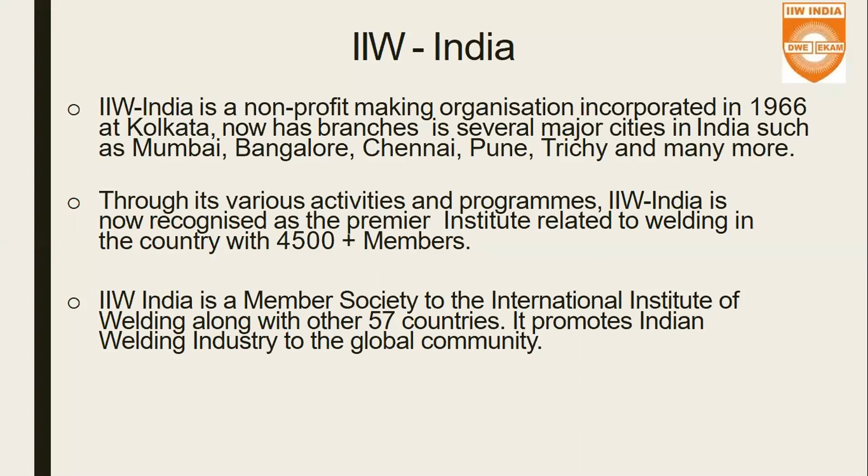What are the major objectives with which IIW India is working? IIW India is assisting the welding industry in India with regards to human resource development, by means of technology diffusion to the industry and individual levels. It is very much helpful to industry with regards to R&D in welding. At the same time, the health and safety of personnel and the industry in totality is important, so it is promoting that also. It is establishing international standards of quality and safety for the overall Indian fabrication industry. These are very important objectives, well covered by IIW India.

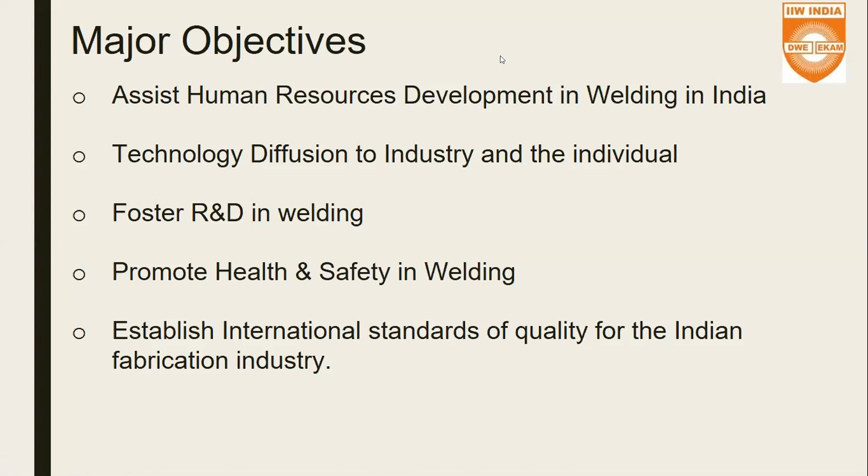Coming to the activities, some important ones are conducting technical meetings like the one we are having today, industry-oriented training programs, and organizing seminars, conferences and exhibitions at branch, national and international levels. One important activity of IIW India is publishing the Indian Welding Journal, which is quarterly, in collaboration with AWS, and a monthly newsletter is also available on its website. We request you all to kindly go through the website to know more details about it.

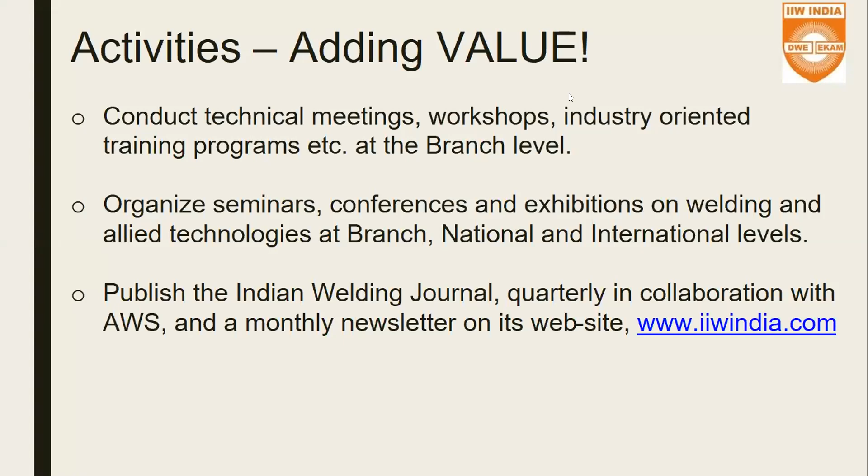For welding training certification, IIW India is the ANB, autonomous national body, providing the platform for individuals to obtain international qualifications, for example IWE, IWT, IWS, and many more. With regards to skill development, IIW India is providing career opportunities by means of skill councils in association, for example automotive sector skill council, capital goods sector skill council, and Indian iron and steel sector skill council. By this association, it is catering to skill development across the country.

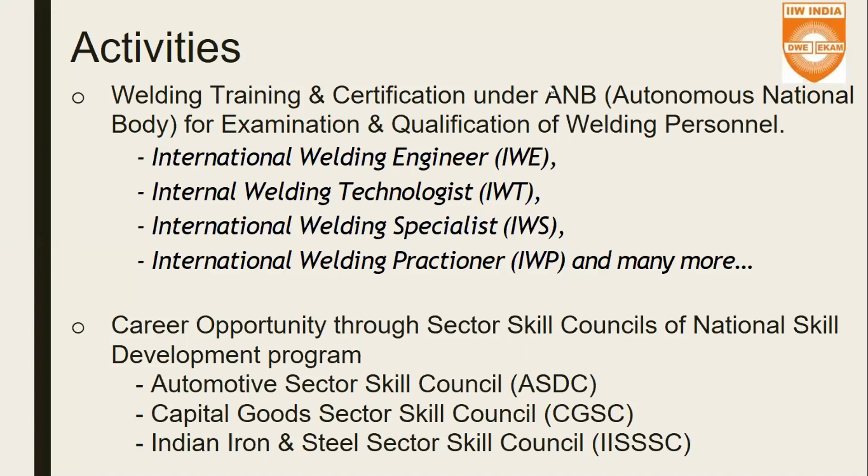As already discussed, Indian welding journals, branch level and national level technical programs, and skill development programs are core activities, along with conducting AM-IIW exams and national welder training and certification programs.

One important activity IIW offers for the industry is the manufacturer certification scheme as per requirements of ISO 3834, training the trainers, arranging welder competitions for both male and female, and many other things.

What are the benefits of being a member? You can take advantage of several courses and examinations for improvement of your own personal career. You can acquire and disseminate knowledge in welding to the industry. There is useful networking with fellow national and international experts. You get access to various technical journals published, and access to monthly technical lectures. You also get concessional charges for paid seminars and technical workshops.

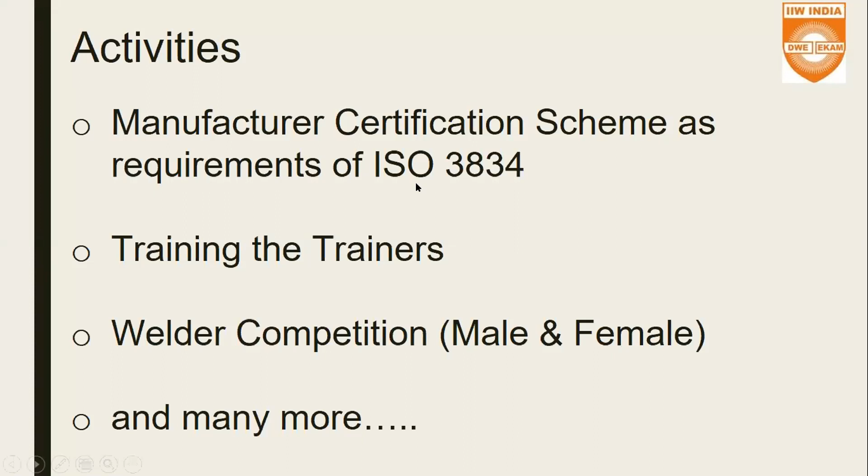The coming slides are just for your glance to see the types of membership for individuals. You can become a member, or opt to become an associate member, or even a student member is possible for you to get associated with IIW. These are the details you can see on the slide. Depending upon your qualification and eligibility, you can join us as a member of IIW.

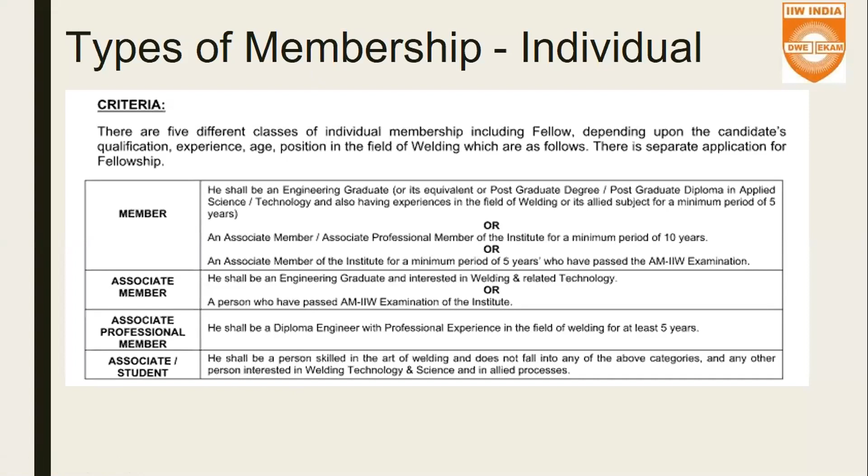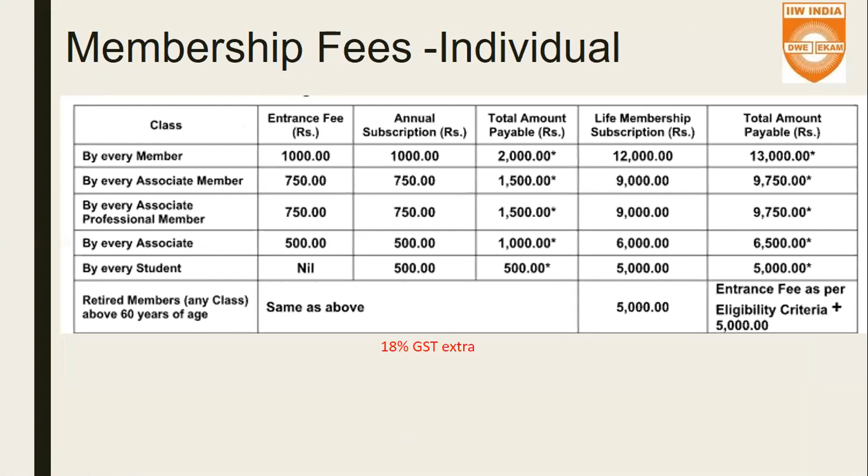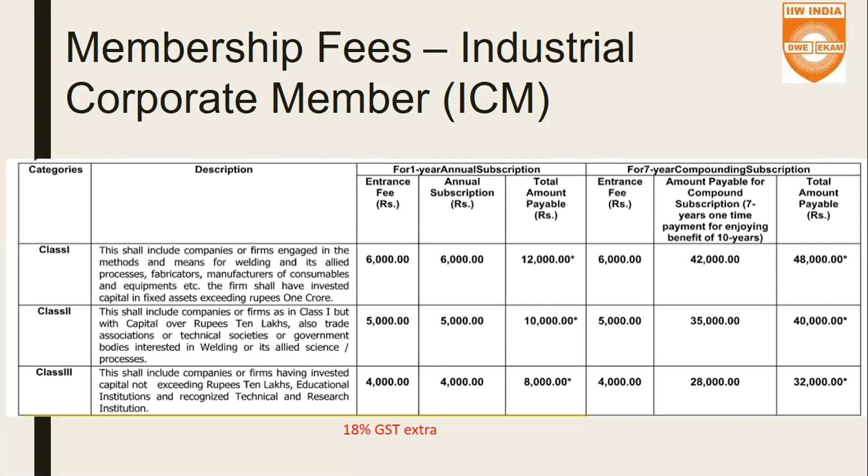This is something important for industry - you can also become our industrial corporate member as an organization itself. We have 3 different categories for becoming an ICM with us, and this slide shows those details.

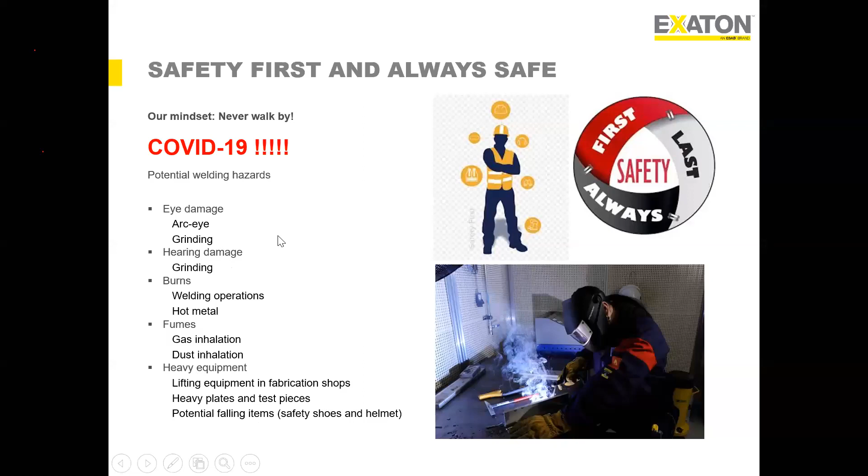Now, before we go to the topic on duplex, I'll roughly explain about stainless steel, why we call it stainless. The terminology says stainless means there should not have any stain. So what is the mechanism of having stainless?

So typically we say that for steel to be stainless, we need a minimum of 12% chromium, and definitely it could be more. The higher the chromium content, the better the anti-corrosion property.

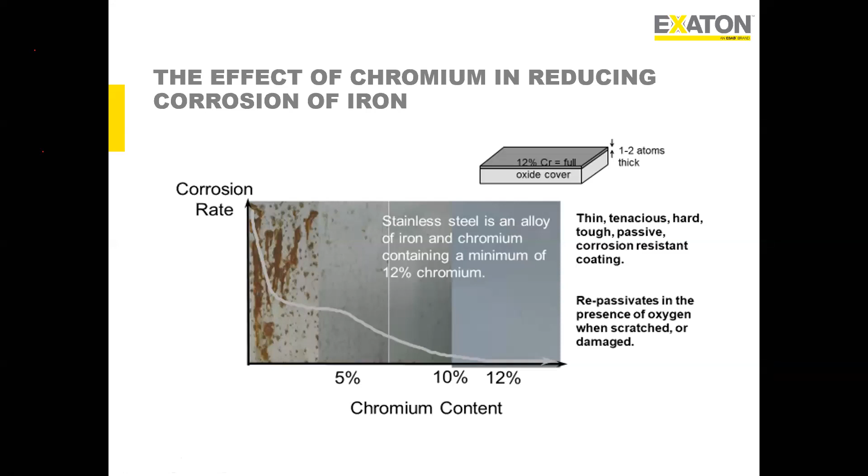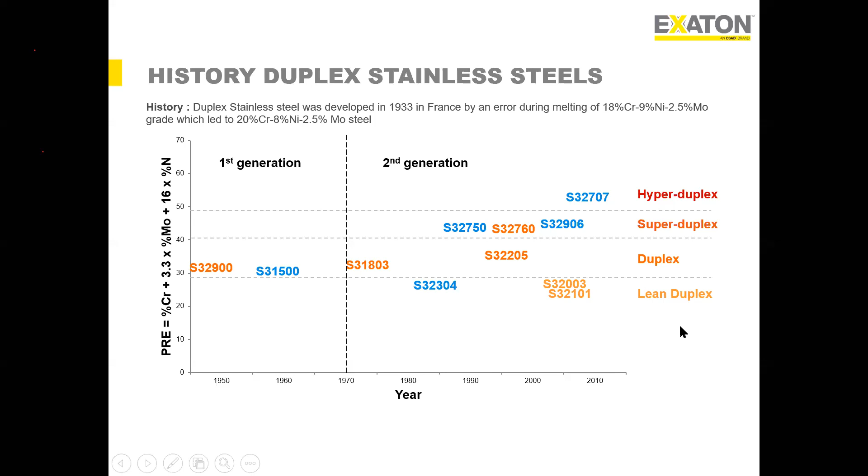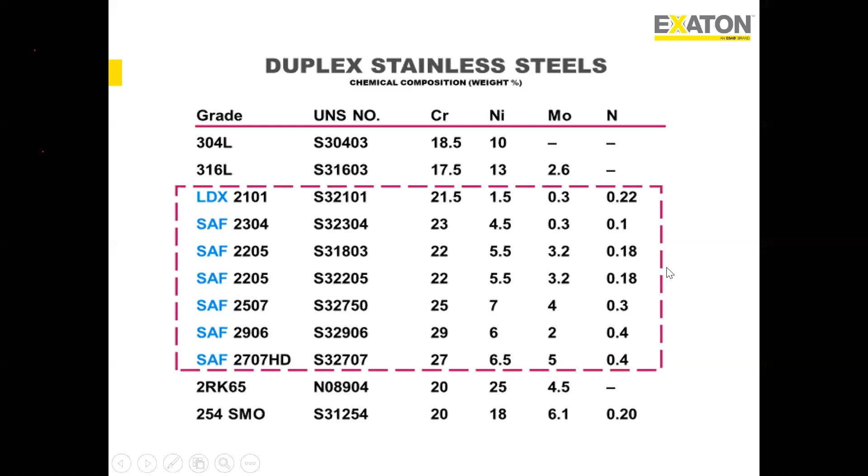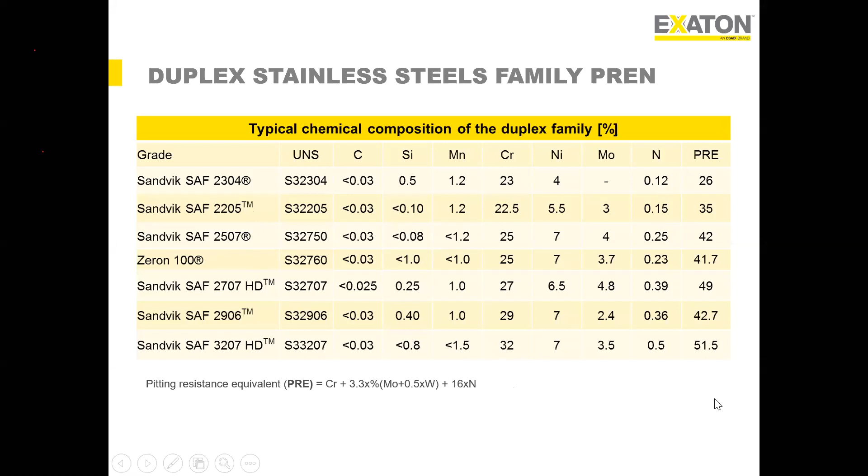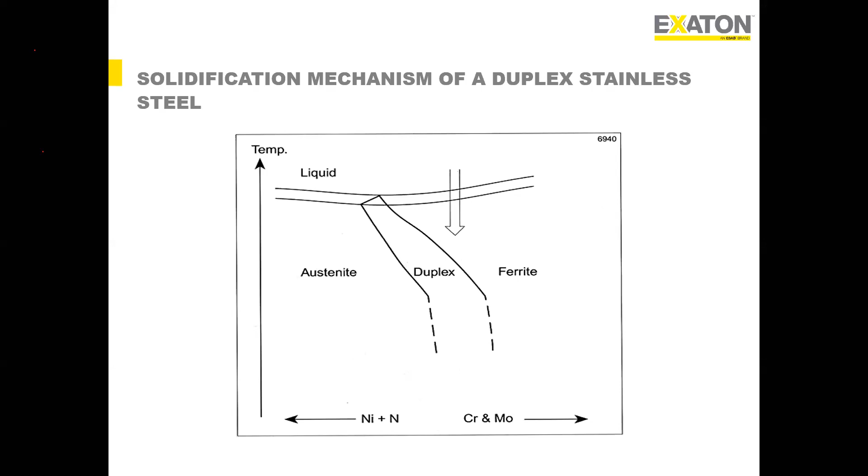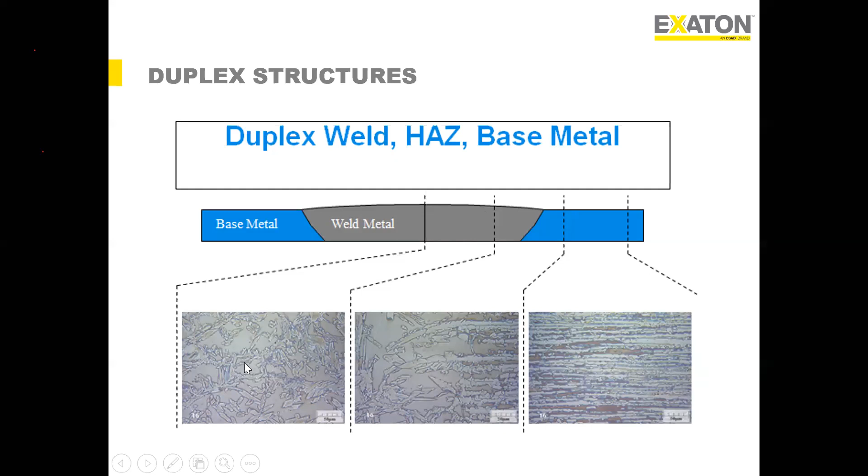So when you talk about the general properties of duplex, why are we actually looking for a duplex structure? We know that austenitic stainless steel has few good properties, like impact properties being very good. It can be used in even cryogenic applications down to minus 196 degrees centigrade. But on the other hand, it does not have good pitting resistance or corrosion property. When you talk about ferritic stainless steel, it has good strength and better corrosion property, but it is inferior in terms of toughness property.

So if we combine these two structures together into one, we can actually optimize both the mechanical properties as well as the corrosion properties. That's what we are trying to achieve with this duplex structure. So it gives very high strength and good ductility.

And this high strength - higher the alloy element, which means higher the grade of the duplex family, from lean duplex to duplex to super duplex to hyper duplex, the strength in terms of both tensile and yield strength is getting higher and higher. And at the same time, the corrosion resistance is also getting increased.

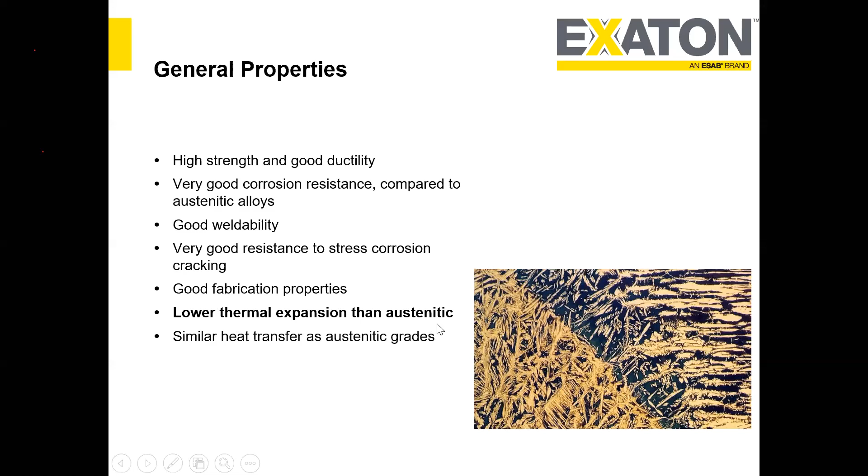It has lower thermal expansion than austenitic stainless steel, and similar heat transfer as austenitic grades. If you see here, it has given typically the thermal expansion graph. It is important to see one more thing - that carbon steel and duplex stainless steel have almost the same thermal expansion. So when you do dissimilar welding, it is much more compatible, even compared to 316L.

Yes, we do a lot of dissimilar joining with 316L to carbon steel, but if we compare carbon steel to duplex, it is much more suitable in comparison to 316L. Okay.

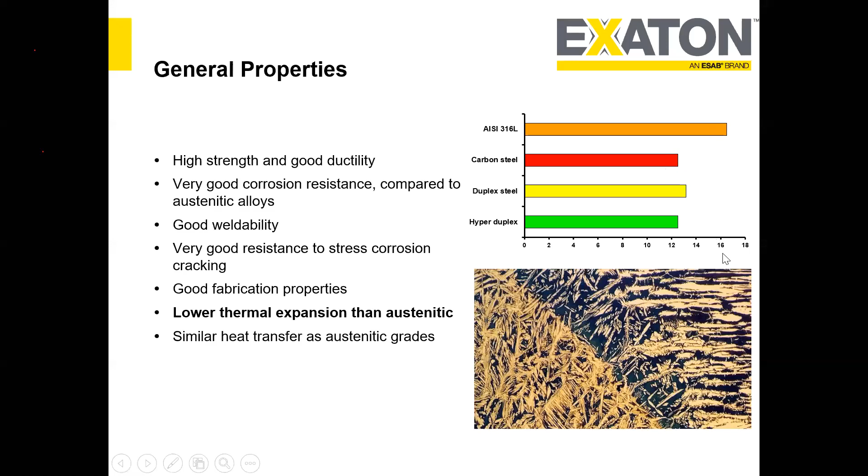These are the mechanical properties of austenitic stainless steel, specifically the yield strength. We see the 316L around 200 MPa, whereas duplex is more than 400, super duplex is around 520-550, and hyper duplex is more than 600, around 650. This shows that even 254 SMO or 904L, super austenitic stainless steel, is lower in yield strength compared to any of the duplex family. So it gives us confidence in the yield strength design consideration, because we have ferrite content, nitrogen, and a smaller grain size, which helps us achieve such a high yield strength.

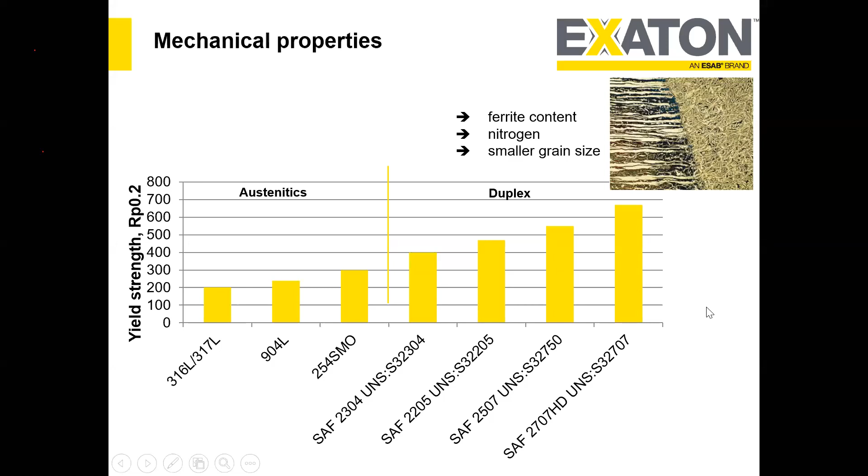Now, structural stability is very important for duplex, and this is one of the real challenges during fabrication. These three alloy elements are helpful, but at the same time they give a detrimental effect on structural stability. So structural stability decreases with increasing amounts of chromium, molybdenum, and tungsten. Later I'll show a graph. What this signifies is that the higher the grade of the duplex family, the more challenging it is to get a stable structure, without intermetallic phases or undesired structure.

There is a sensitive temperature zone for austenitic phase, from 900 to 1050. Duplex is basically more sensitive, around 600 to 1000. You've probably heard of sigma phase, chi phase. These kinds of detrimental phases form within this temperature zone. I'll show this later.

Another important thing is that austenitic-ferritic stainless steel is also prone to 475 embrittlement. This is very critical, and I get a lot of questions about post-weld heat treatment. We'll explain later why it's challenging to do a conventional post-weld heat treatment, even in cladding, such as duplex cladding with carbon steel - why we cannot do post-weld heat treatment or stress relieving at say 600 or 610 degrees centigrade. This is one of the culprits.

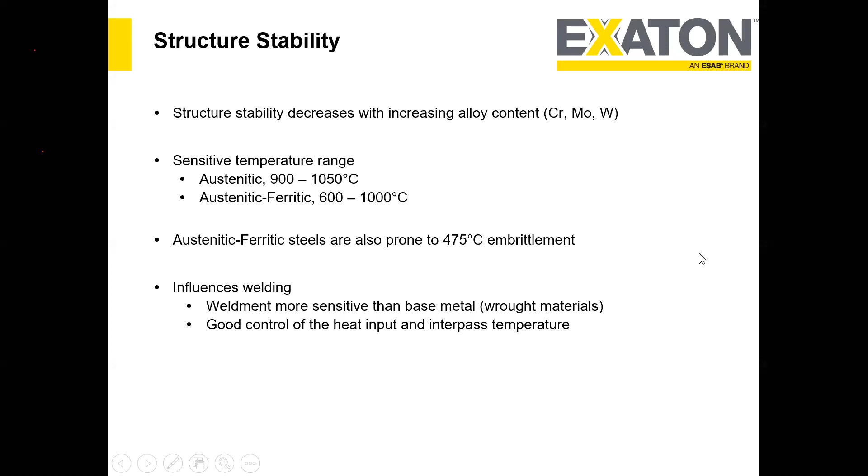This is a little bit interesting graph. What it says is, as I mentioned, the higher the alloy element content, the more susceptible it is to forming these kinds of intermetallic phases. You see here chromium, molybdenum, tungsten, silicon - these are the alloy elements present in duplex.

Higher the content of these alloy elements, the upper C curve moves to the left hand side, and with moly, tungsten, silicon it also moves upward. What does this mean? Let's assume we are welding in the liquid phase and it slowly cools down - this is a function of time. The more time given, the higher the chance of intersecting the C curve, and the moment it intersects, it has a higher potential to form intermetallic phases. When the alloy element curve moves left, it means we have less time to avoid intersecting the upper C curve. And when it moves upward, even at a higher temperature it has the potential to intersect this C curve and form intermetallic phases like chromium nitride, sigma phase, chi phase, and secondary austenite. So sigma phase is very important here.

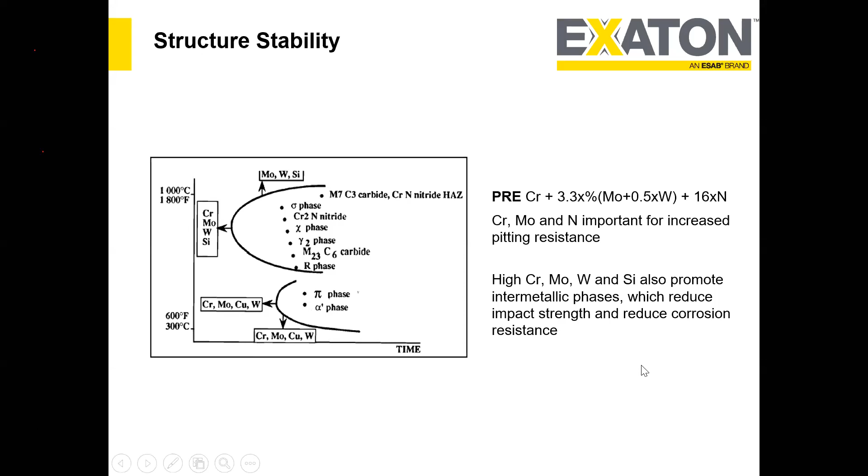This slide shows different types of intermetallic phases forming in different temperature zones. One of the most important is sigma phase, which forms between 600 to 1000 degrees centigrade, and chi phase forms between 700 to 900 degrees centigrade. Chromium nitride is also interesting, or the most challenging undesired structure we get. All of these are undesired intermetallic phases, but the thing we most often get is sigma phase, which is an absolutely brittle phase.

When you talk about corrosion properties, one of the most common tests is ASTM G48, or ASTM G48 Method E, where we try to get the CPT, critical pitting temperature, or we do Method F, where we measure the CCT, critical crevice temperature. There's a formula here: CPT is 2.5% chromium with 7.6% moly, 31.9 nitrogen, minus 41.

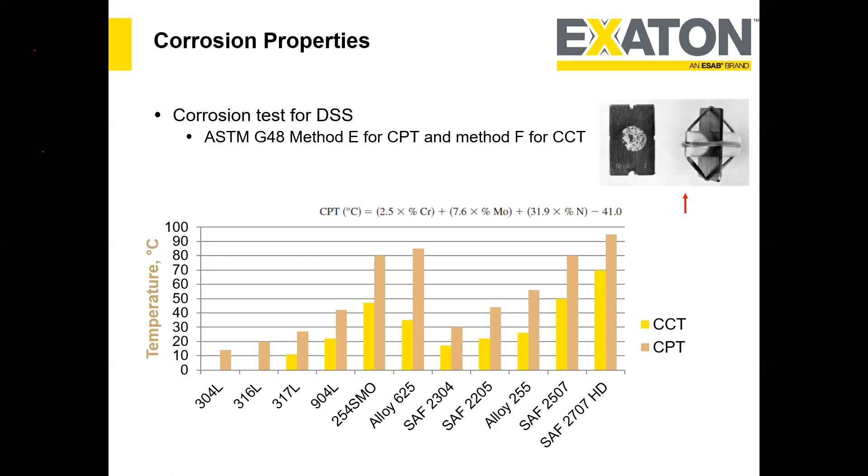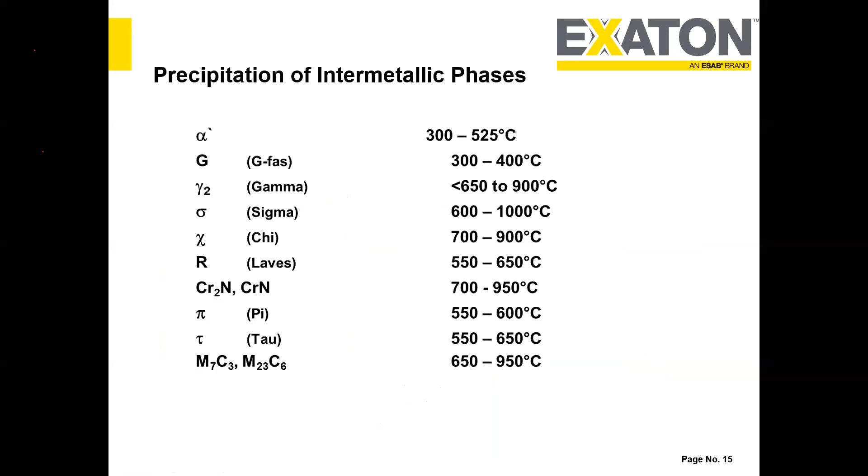The cooling rate matters because, as I explained, these intermetallic phases are basically a function of temperature and time. When we solidify, if we give more time, or if our cooling rate is slow, there's a high potential that the liquid weld metal will stay in this critical temperature zone, say 1000 degrees centigrade down to 600, 500, 400, and slowly go to room temperature. If the cooling rate is slow, it will stay longer in that critical temperature zone.

If it stays for a longer time period, it has a higher potential to form these intermetallic phases, or intersect the C curve and form the sigma phase. So slow cooling is not good because it has high potential to form sigma phase or intermetallic phases, any kind of sigma or chi.

So for duplex stainless steel, we need to optimize the cooling rate such that it neither intersects the C curve, which forms the undesired sigma phase or chi phase, nor cools so fast that it forms chromium nitride.

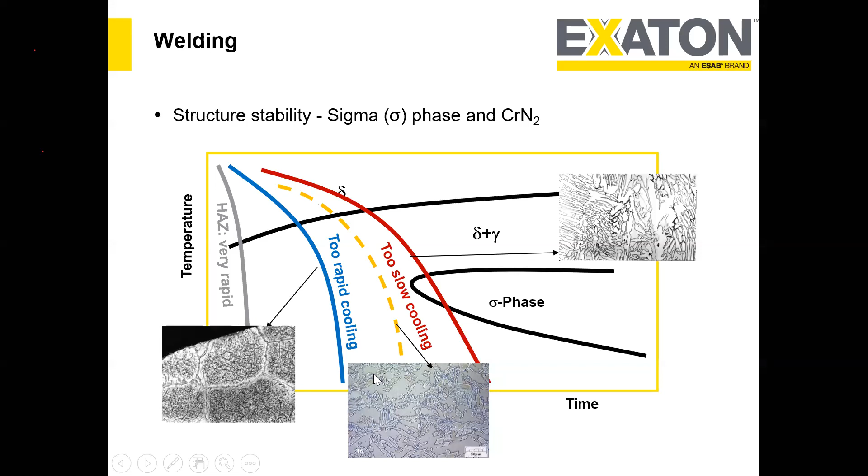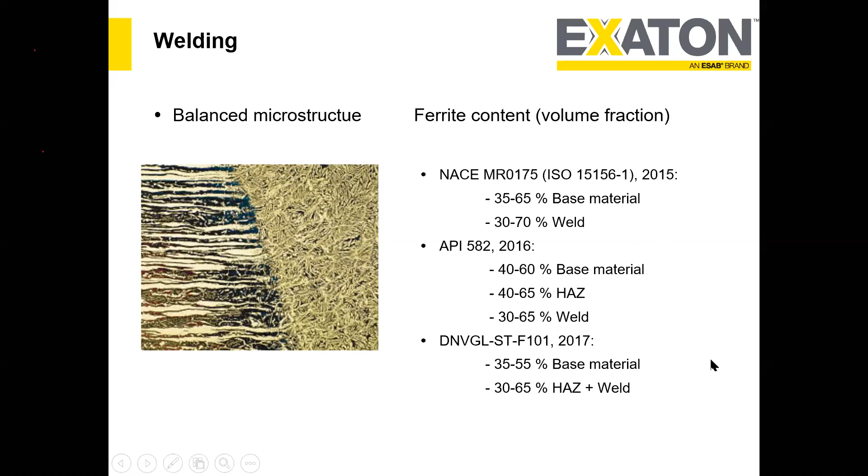For welding duplex, there are a few critical things, and this is basically one of the thumb rules on how to avoid welding defects. Compared to stainless 316L, we recommend going for a wider root gap. A wider root gap helps with two things: one, the welder has better access to penetrate the root, and another is that it helps make the root pass or weld metal by melting the filler metal more compared to the base material.

Because the base material has a lower amount of nitrogen, if we melt more of the base material, it will evaporate the nitrogen, causing nitrogen depletion.

So it will have less pitting resistance, and at the same time it will not have enough microstructural balance. So wider root gap is important. Root face is also important. Root face gives more access for the welder to melt on the filler metal, and wider the gap, the more access for the welder. So compared to stainless steel, we recommend a wider root gap, a root face, and a wider angle of the groove for better access.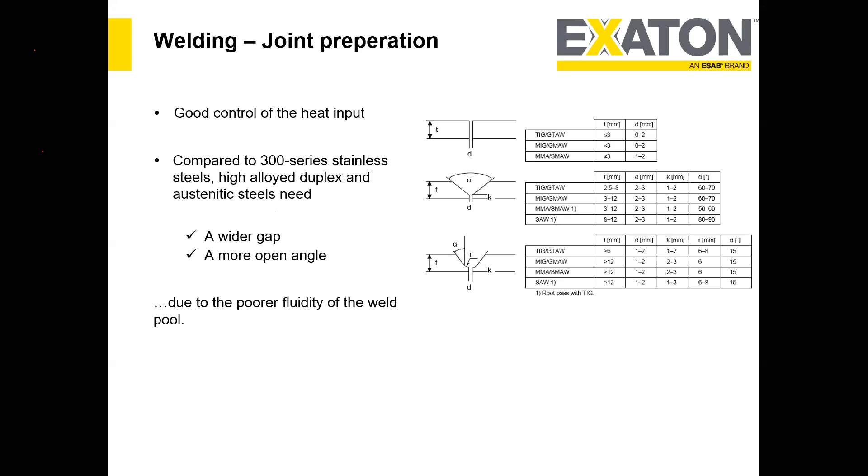Okay, now this is one of the most interesting and most important slides in terms of fabrication. As I explained, faster cooling is not desired, and slow cooling is also not desired. Now, when you talk about faster or slow cooling, how do you control it in the weld metal? We have only two options: one is heat input, and second is the interpass temperature. How do they influence it?

Higher the heat input or higher the interpass temperature, you are basically increasing the temperature of the base material. Now, when the liquid weld metal cools down, your gradient is low, so it has a potential to cool down slowly. If it cools down slowly, it will take more time in that critical temperature zone. If you stay for more time in the critical zone, it has a higher tendency to form intermetallic phases.

On the other hand, if your heat input is very low, your gradient is high, so the liquid weld metal will tend to cool down much faster. If it cools down much faster, two things will happen: one, it has a tendency to form chromium nitride, and on the microstructure, if it cools down faster, you'll have more ferrite, because liquid transforms to delta ferrite, so ferrite will not have enough time to transform into austenite, so you'll get more ferrite.

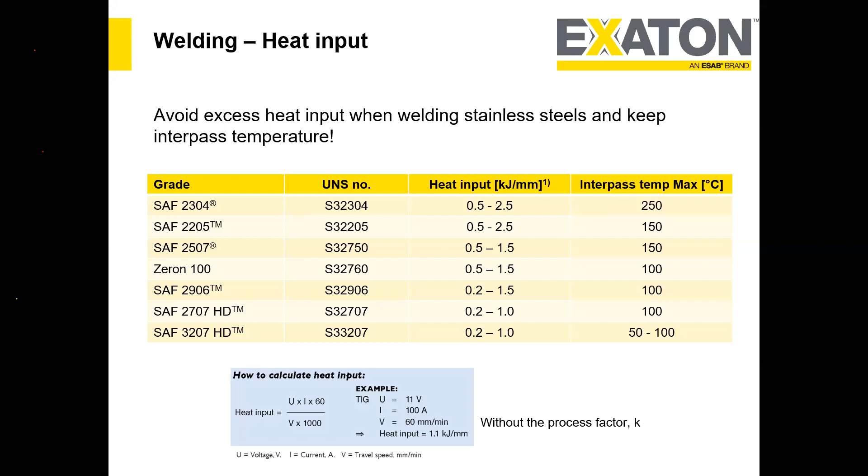Now, the most commonly used processes—it could actually be used in any process—but the most commonly used processes are TIG, MIG, submerged arc welding is also used but in limited applications, and SMAW is also there. I would say like 60 to 65% of applications are with the TIG process.

There's another reason for TIG: in most cases, the duplex family grades have very high strength, both tensile and yield strength. So the designer has a chance to reduce the thickness when they make the design calculation. Because of the high strength, the overall weight can be reduced and the thickness can be reduced. So most of the time we get thin material of the duplex family. Specifically, if you go to higher grades like super duplex or even hyper duplex, you usually get very thin material, so for thin material, people tend to go for a TIG process.

If it's a thick material, people go for a combination of TIG and SMAW process. Sometimes they go with SAW processes as well. I will explain later on a few case studies basically on that.

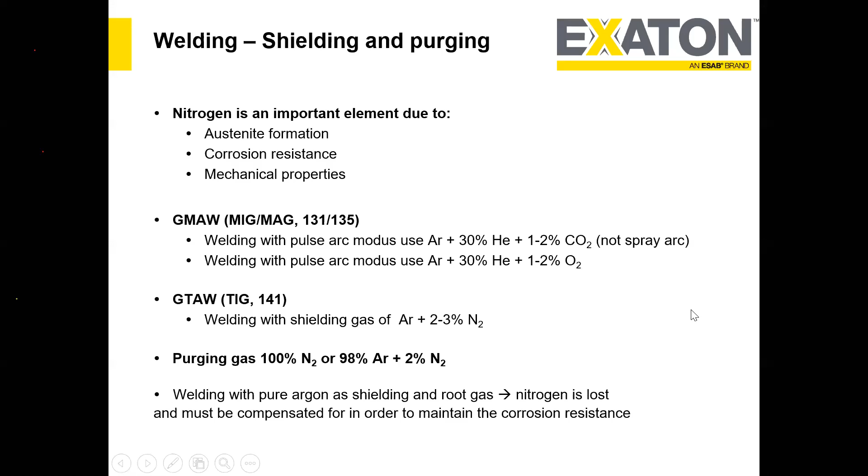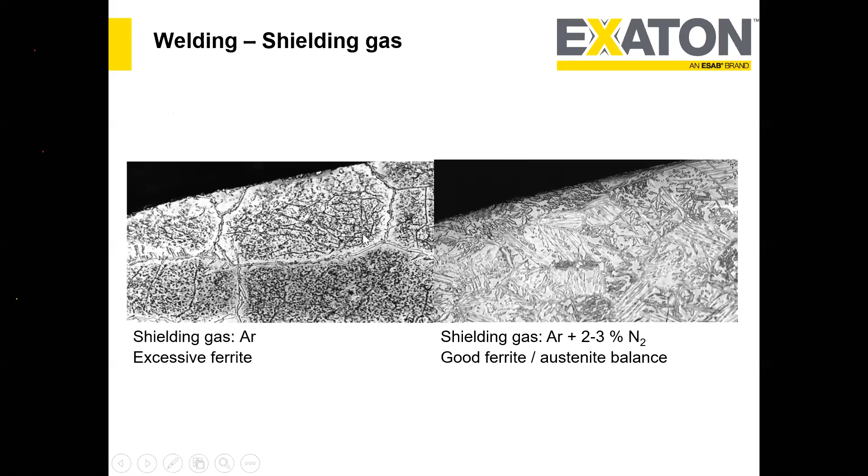Okay, so welding with purging of the gases. Generally, single argon is not recommended, especially for high alloy duplex material, as I explained, because if you use argon there's a potential for an excessive amount of ferrite and less austenite. So we need the desired microstructure.

Argon leads to loss of nitrogen on the surface of the root bead, to the parent metal 0 to 1 millimeters from the fusion line. This is what I explained just now. So argon with 2 to 3% nitrogen, or 100% nitrogen, can be used.

I put this with caution, as I told you that nitrogen, if used, has good potential for corrosion properties, but make sure we have the risk of having even less than 30% ferrite. We can get like 25% ferrite, which is also not good.

So this is what I explained, that a thin skin of austenite, about 20 microns thin, forms on the surface of the root bead fusion line, enhancing the corrosion resistance.

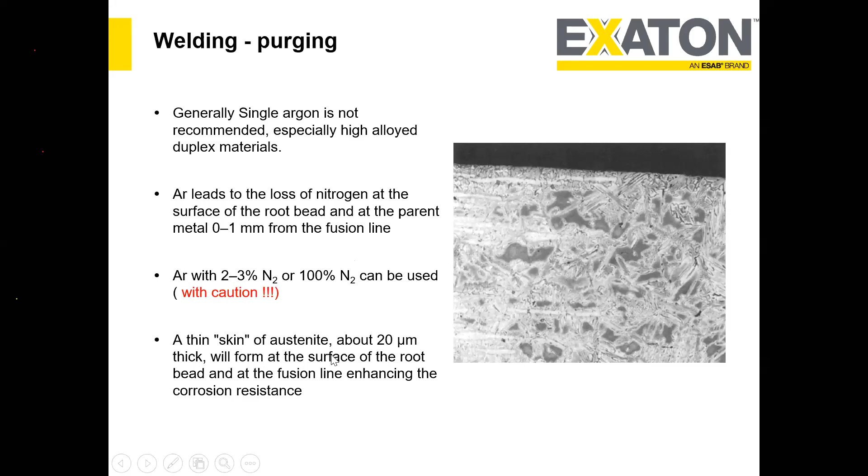For SMAW, we recommend 22.9.3, actually 22.9.3.LR or LB. LR is rutile type, LB is basic type. LB gives better impact properties, but the cosmetic look is not nice. LR has a nice cosmetic look, but it does not give better impact properties.

And for submerged arc welding, we go for the 22.8.3.L with the 15W flux. For super duplex, we recommend super duplex 25.10.4.L, and for hyper duplex we recommend 27.7.5.L, which is basically hyper duplex in nature.

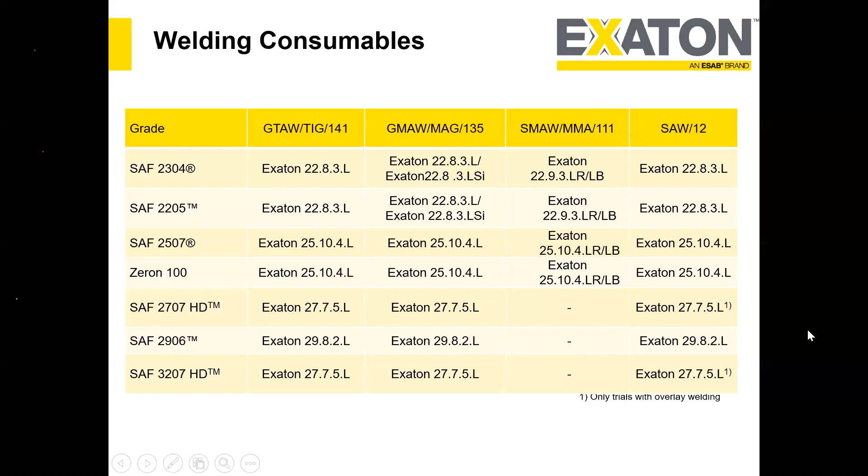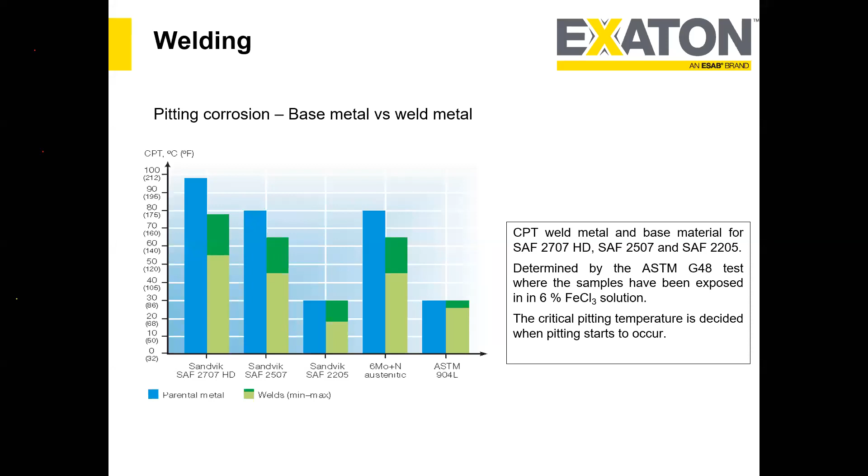Okay, so I will explain this one. There are a few corrosion and weld metal issues. I think the next slides will be much easier.

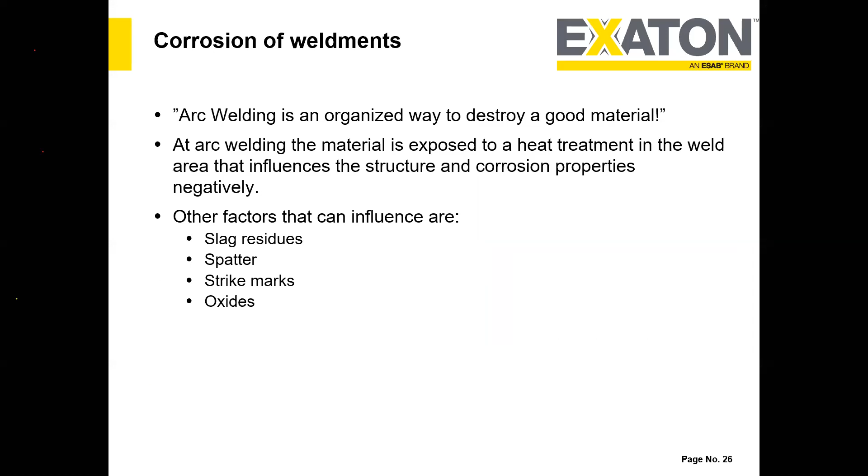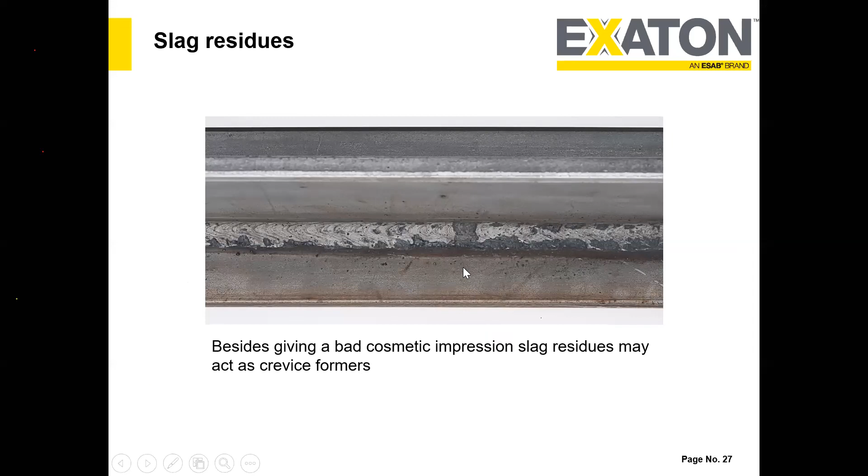Okay, so you see here the slag residues. Besides giving a bad cosmetic appearance, a slag residue may act as a crevice former. So please make sure that when you do the welding, you should not leave any kind of slag. It's really bad for corrosion, it has a high potential to create crevice corrosion.

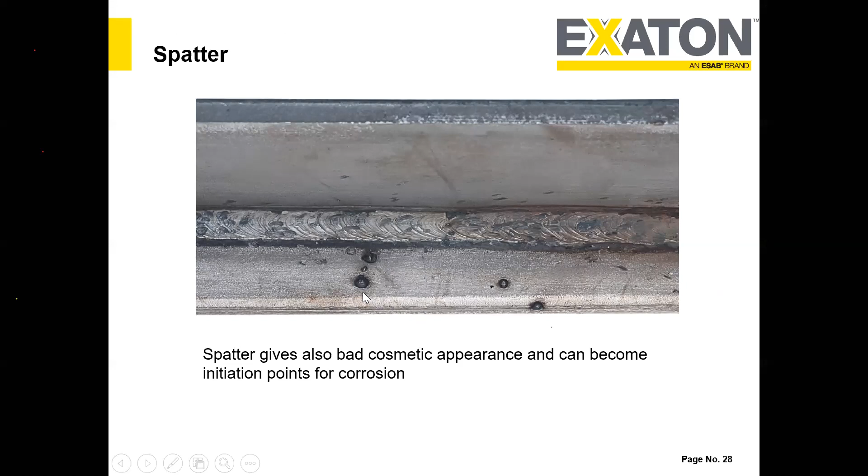Spatter is very dangerous. It not only gives a bad appearance, it is absolutely a potential area of pitting corrosion. So any kind of spatter should be removed. It is not desired in any kind of duplex material.

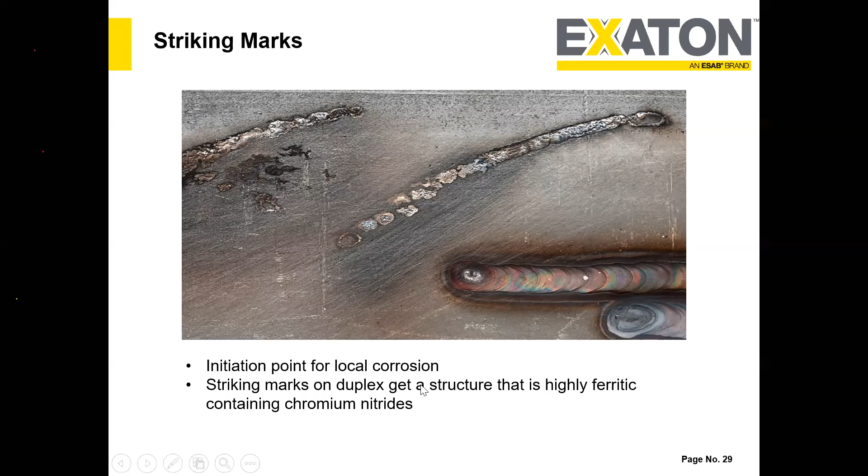Arc strike is really dangerous. It is basically the initiation point for local corrosion. When you do the arc strike, it basically gives instant melting and a very high cooling rate. Because of this very high cooling rate, it contains a lot of chromium nitride. As I told you, if you have a faster cooling rate, it forms chromium nitride. So it is highly ferritic because it does not have time to transform into austenite. It has a lot of delta ferrite, and at the same time contains a lot of chromium nitride. So it is dangerous.

Oxides are absolutely undesired because the higher the oxide content, the lower the corrosion resistance. So please remove the oxide layers. It could either be pickling and passivation - this is the best thing, I'll explain later, also we have a chart - or grinding, buffing, wire brushing, or blasting.

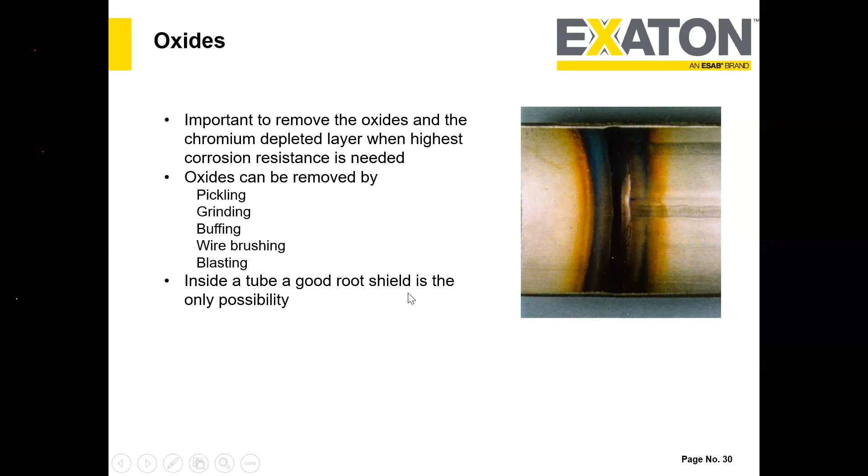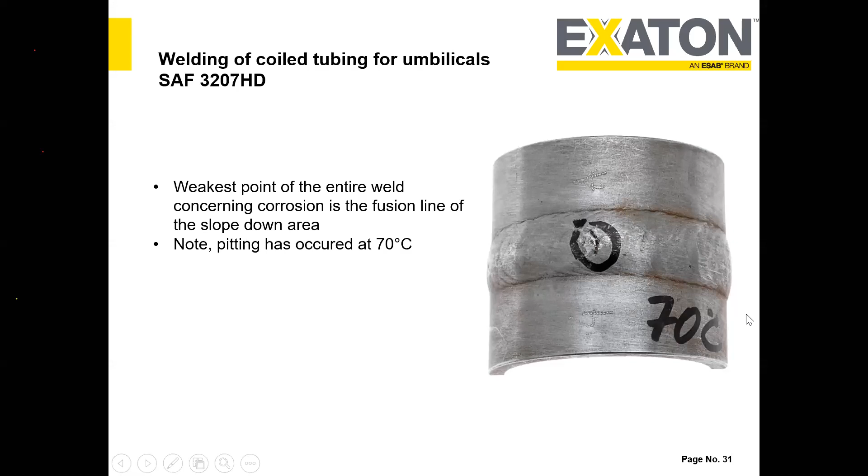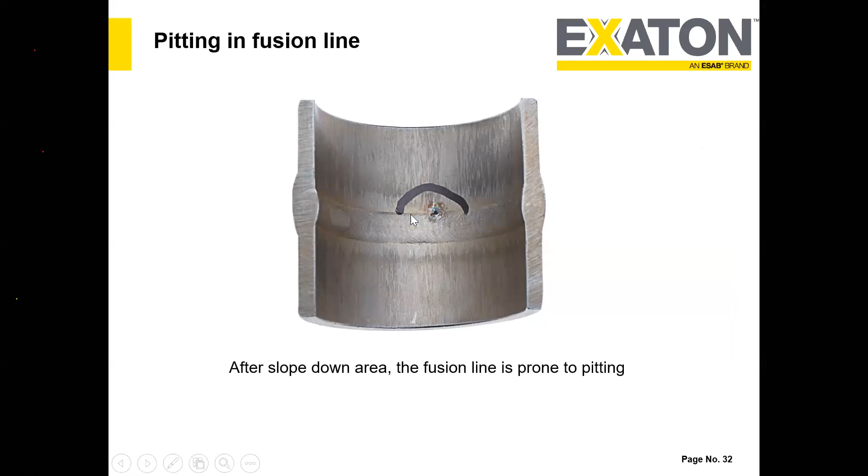This was actually happening at 70 degrees centigrade, although it is a very high temperature - pitting at the fusion line. So after the slope down area, the fusion line is prone to pitting. So the weld root should have the right contour, otherwise it has a high tendency to have fusion line pitting.

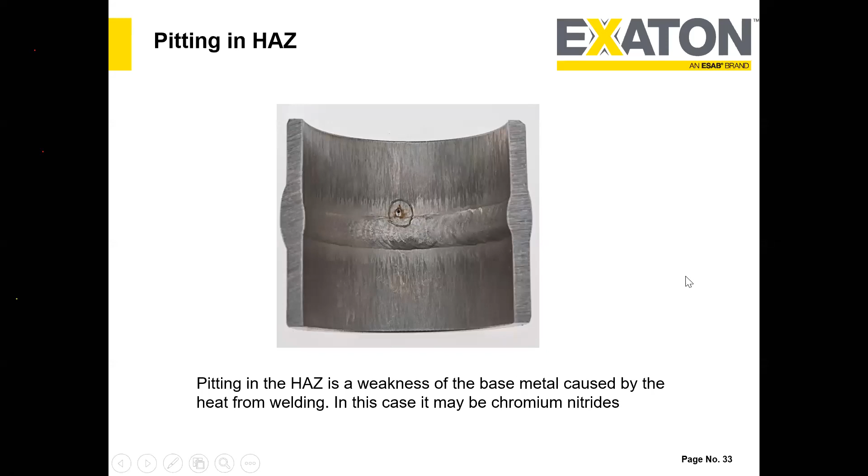Heat affected zone, which is very critical, it could form because of chromium nitride formation. So we need to optimize our parameters. It looks like that if we cut, it forms pitting at the HAZ. For information, pitting occurs I would say 80% at the root area, and the remaining 20% either in the cap or inside. So the most dangerous area is inside.

This is very important - why super duplex should not be welded with Inconel 625 or ENiCrMo3. The welding of duplex stainless steel with a nickel-based filler wire is not recommended by Exaton unless it is a dissimilar joint between duplex and high-alloyed austenitic stainless steel. Due to diffusion of nitrogen in the austenitic weld metal, the fusion line gets fully ferritic, which is dangerous.

It has a potential for selective attack on the fusion line, and also there's a potential of knife line attack. The reason can be diffusion of the important alloy element, that is nitrogen, in the duplex stainless steel, leaving an almost fully ferritic fusion line.

So this is the area where we could get, it's called the HAZ, heat affected zone, or it's called UMZ - unmixed zone. So it does not mix properly. So we recommend not to use Inconel 625 or any nickel-based filler wire.

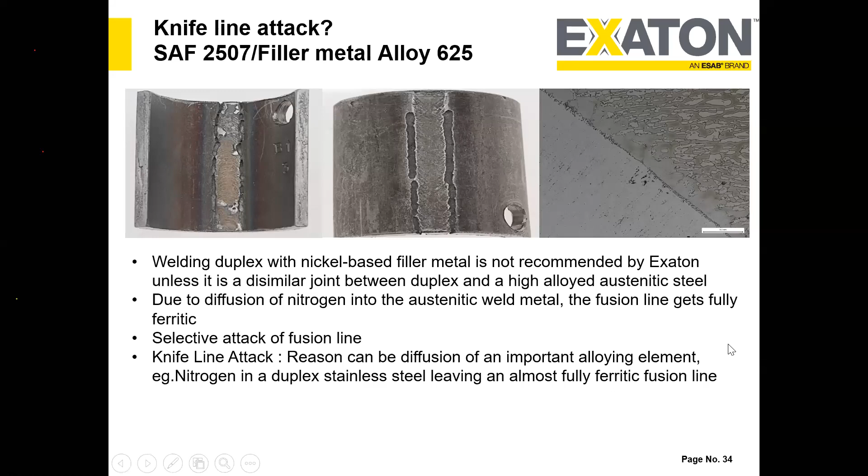So this is the important post weld treatment. I got several times a question that we followed everything, all the welding was good, looks nice, but if we keep it in our workshop or outside, within 1 month or even 15 days, we can find a brown color on the ripple. Why did it happen? It is basically a potential area of corrosion.

Although you take care of all the right filler metal, the right parameters, but if you don't do this post weld cleaning or post weld treatment - what is post weld treatment? It is basically that when you do the welding, you are destroying the chromium oxide layers with a lot of undesired things. So we should make sure that we remove all the undesired oxide formation layers with proper cleaning.

So pickling and passivation is the most important thing, which gives the maximum potential. So we do the acid cleaning, then we neutralize the acid. Naturally the chromium present on the weld metal or base material gets in contact with the oxygen in the atmosphere and forms the stable passive layer of chromium oxide.

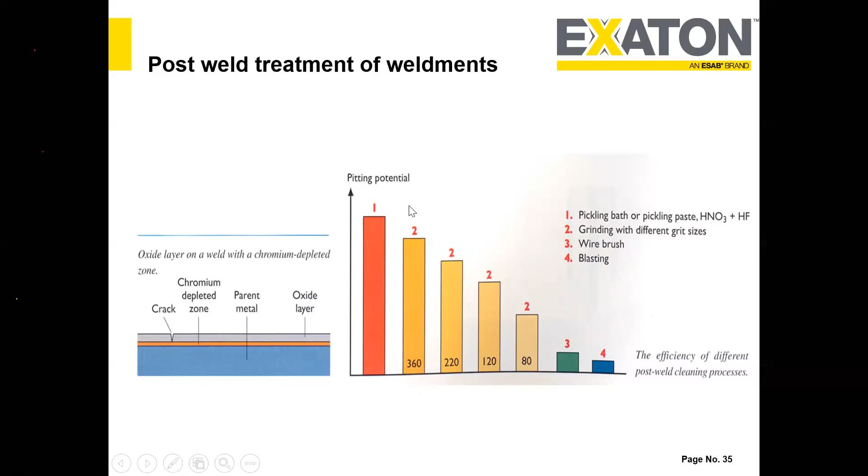Now number 4 is blasting. Blasting could also be done, but it is not as good. So we have blasting, then wire brushing, then grinding, and pickling and passivation. We recommend if you want to get the highest pitting potential, you should go for acid pickling and passivation.

Okay, so this is an important slide. Sometimes we get a question - can we go for post weld heat treatment? We have carbon steel cladded with duplex or super duplex, so can you do stress relieving? Try to avoid stress relieving, and if it's really required, it is definitely not at all recommended at 600 degrees centigrade. You see this one - if it can intersect the C curves, or even the high potential of 475-degree embrittlement, anything above that is absolutely not recommended.

Higher it goes, the ferrite phase has the potential to transform into sigma phase. So definitely no. If it is really required, then it can be done at a lower temperature, let's say 300 degrees centigrade, for a longer time period, which will avoid such kind of C curves, and we can actually eliminate the residual stresses.

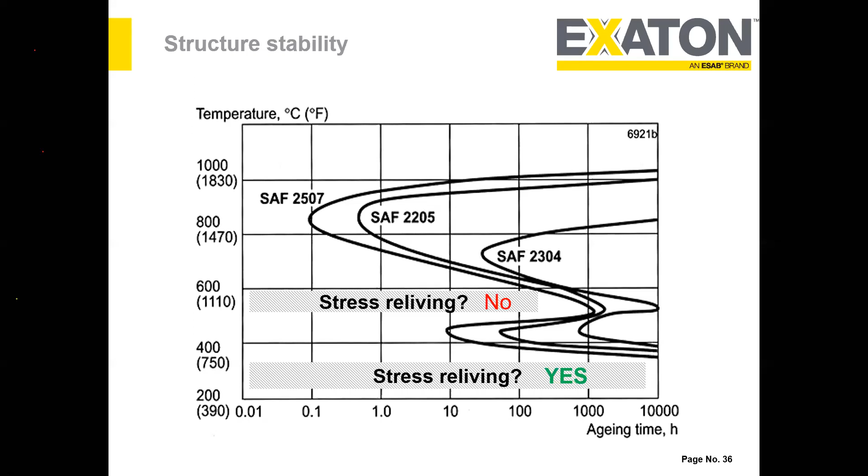I'll try to show a few pictures where lean duplex, duplex, super duplex, or hyper duplex can be used. In the paper and pulp industry, we can use this, where either lean duplex is very much used, or sometimes duplex.

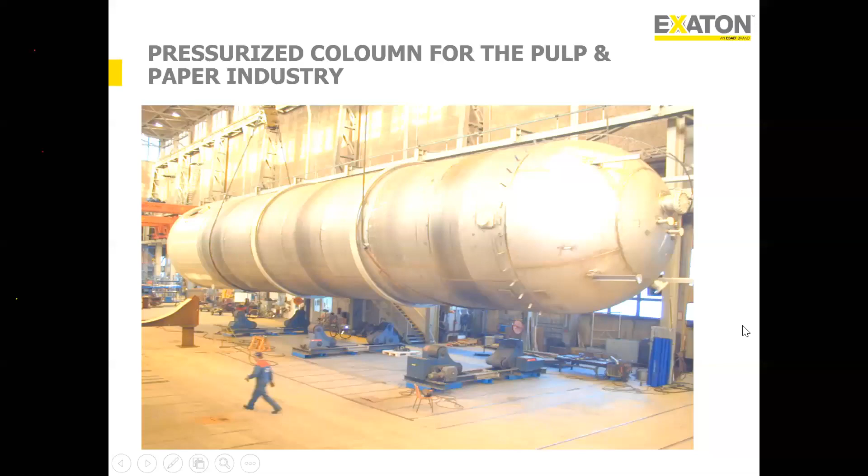Offshore pipeline application is a huge application of duplex, super duplex, and now hyper duplex. This is a spiral bridge in Singapore. You can see this. This entire bridge was constructed with lean duplex, LDX 2101 basically, and SAF 2304.

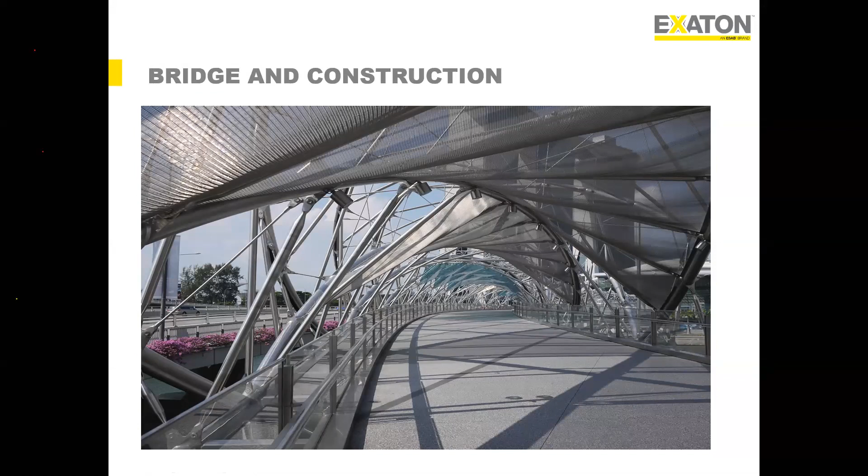Chemical and petrochemical industry, yes, absolutely, there's a lot of application of duplex. Tanks, nowadays we can see tanks made with lean duplex or even duplex.

Umbilical tubing is a huge application of hyper duplex. It goes very deep in the sea, which is highly corrosive in nature, so we need hyper duplex for that.

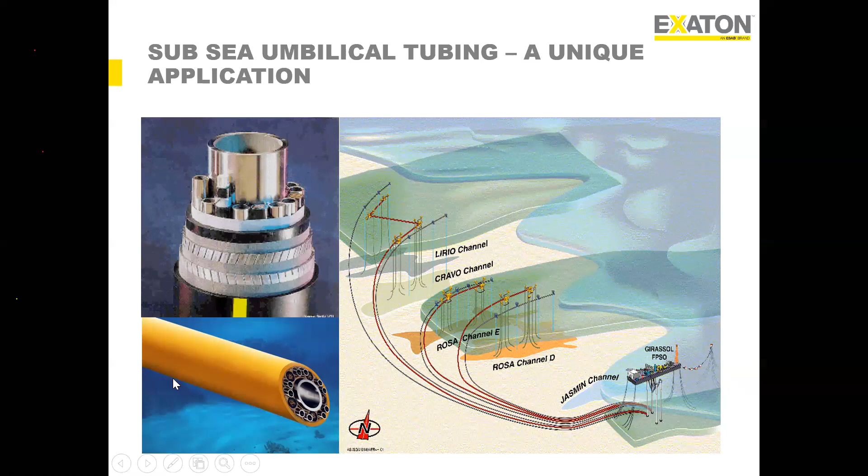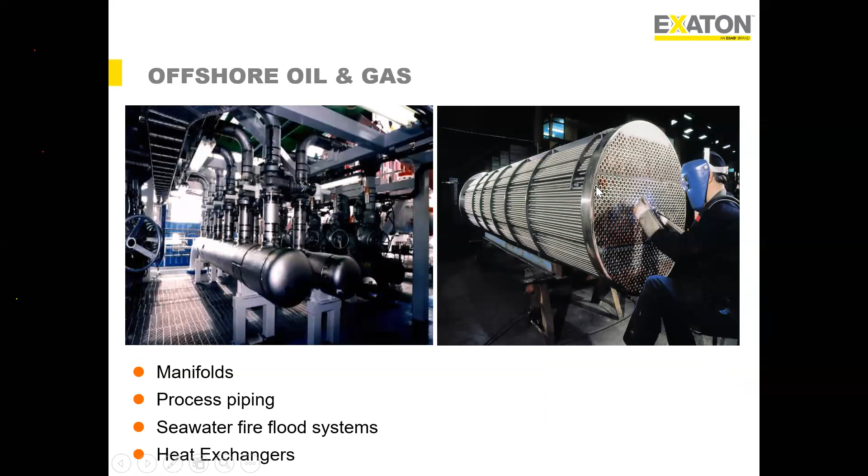Hydrometallurgical plants like process piping, heat exchangers, reactors, tanks, agitators and wafer systems have applications of the duplex family. Offshore oil and gas - manifold, process piping, seawater fire flood systems, heat exchangers - we have duplex, even hyper duplex and super duplex used there. Desalination has a lot of application of hyper duplex and lean duplex.

Somebody raise hand. Should we take this question or should I continue? Continue, sir, we will take questions at the end. Okay, thank you. Mr. Vignesh has already mentioned on the chat as well, so we'll take it up at the end.

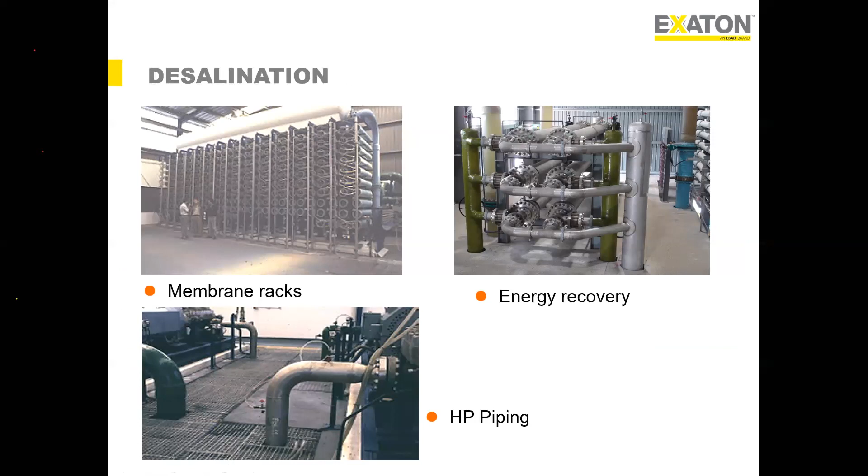Okay, thank you. For desalination, on the membrane rack, energy recovery, HP piping, there's a high application of lean duplex or super duplex. Okay, since I'm going a little fast, probably because of running out of time.

So here are a few case studies which I have experienced over time. This is one of the most challenging case studies, a real life problem, which happened at one of the top-notch shipbuilding companies - I'll not mention the name, they are in the top 5 shipbuilding companies in the world. So what happened: they were using 31803, which is a duplex material with a thickness of 64 millimeters, which is quite high.

You can see the macro structures here. The process used was SAW. The failure was found during the bend test and impact testing. So you see here, this is a 64 millimeter base material of duplex, welded with the submerged arc process, in a 2/3, 1/3 configuration. When they did the bend test, 180 degrees, you see that it completely broke.

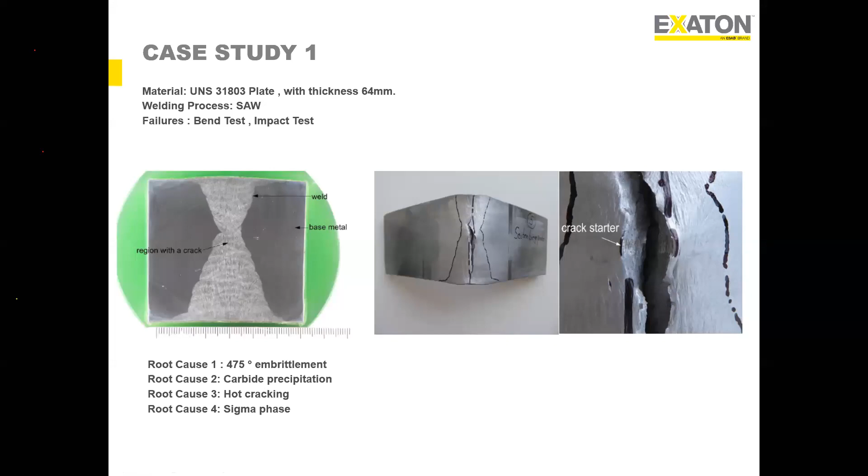When they did the analysis, we found that there was 475 embrittlement present. There was carbide precipitation, there was hot cracking, and also sigma phase. So you see here the structure - this shows the fracture of the heat affected zone due to 475 embrittlement.

Okay, so we did the same analysis and found this. We also found that there's a carbide, basically chromium carbide or M23C6, also formed in the grain boundary of the weld metal as well as the heat affected zone, which damaged the grain boundary in both the weld metal and heat affected zone. This is the area.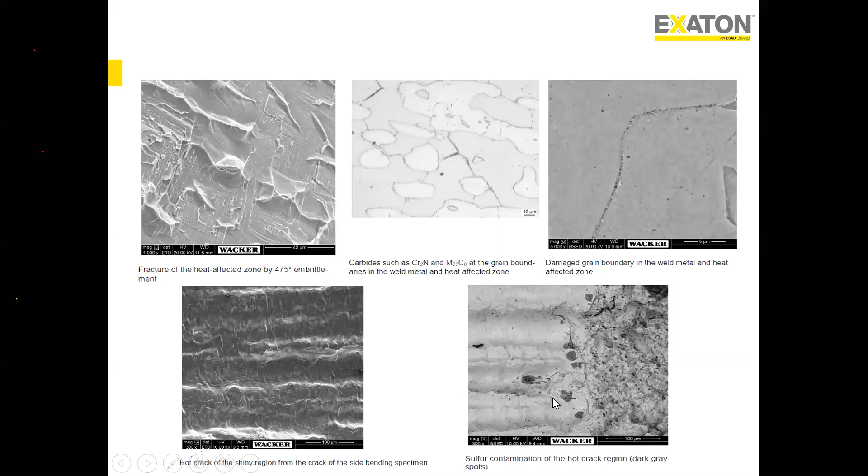Hot cracking of the shiny region was found on the crack on the side bend specimen. So we did SEM, and we found that the shiny things are basically evidence of hot cracking. We also did some chemical analysis and found sulfur contamination in the hot crack region.

We recommend cleaning the bevel properly with acetone. This cleaning is important because there was a lot of undesired grease, cutting marks, and some sulfur content. When welding started, it got burned and tried to absorb moisture and sulfur, so cleaning was very important.

Because they used a submerged process, when welding started, the high thickness caused a very high cooling rate, which basically formed chromium nitride. Over time, as they continued further deposition, the cooling rate got slower and slower, and this started forming sigma phase because the cooling rate was slow. So what was the mistake there?

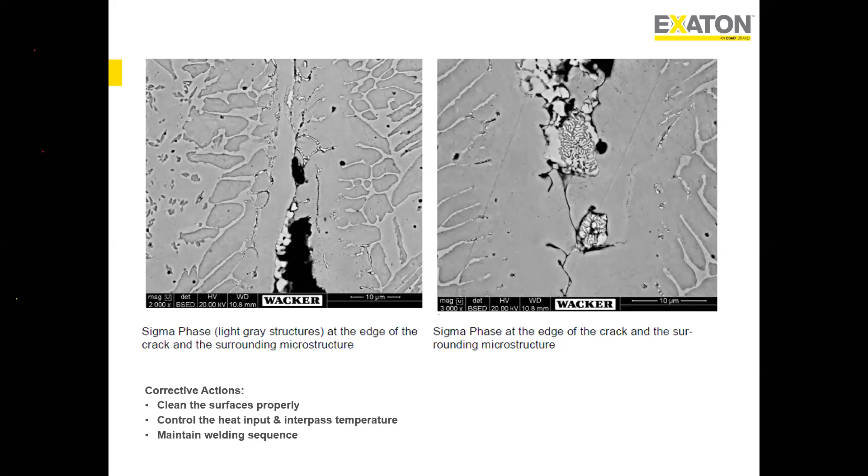Second case study. Just for information, I'm trying to show the higher thickness grades, which is probably rare but has the most amount of challenges. For thin material, people have gained a lot of experience over time to optimize the parameters, but the real challenges come with higher thickness.

So this is another challenging thing which I did in another big oil and gas company in Asia. I can't mention the name, but this is one of the big oil and gas companies. The base material you see is duplex, and imagine the thickness of 80 millimeters - it is a huge thickness material. It was basically a pipe-to-flange welding.

Initially we thought we'd go for only a root pass with a TIG rod of super duplex to protect the root, followed by the SMAW process. Then we found the welder couldn't access the root side because of the high thickness - the torch wouldn't go in, the torch angle wasn't suitable, so it would form a very high arc length and very high potential that it wouldn't melt the weld metal. So we decided to do 20 millimeters with TIG.

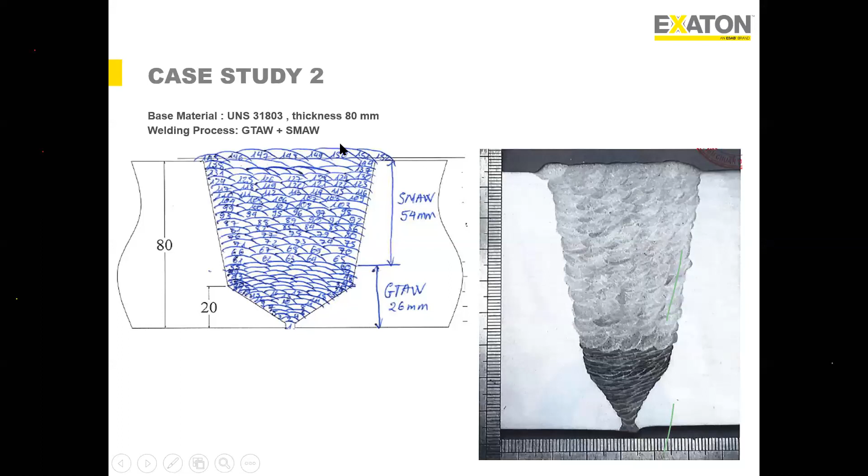Just out of curiosity, what was the groove angle at the bottom and at the top? So this is another thing - it was basically 80 millimeter thick. At the bottom, the groove angle was around 70 degrees, but the more we go up, you can imagine it was quite wider. So we tried to make it around 35 degrees. The included angle was 35, just to make it narrower.

By using this super duplex, with multiple layers and slow heat treatment, we got secondary austenite formation, and the hardness was very high. When the hardness was very high, the impact value fell on the root side. So this is a lesson learned: giving a higher alloyed filler metal is not always necessary. Yes, it gives protection on the corrosion property, but at the same time you might have to sacrifice your hardness. That's where it becomes a juggling act for any duplex family - what is your desired requirement on the project? So depending on the project requirement, we should balance the parameters and the selection of filler metal.

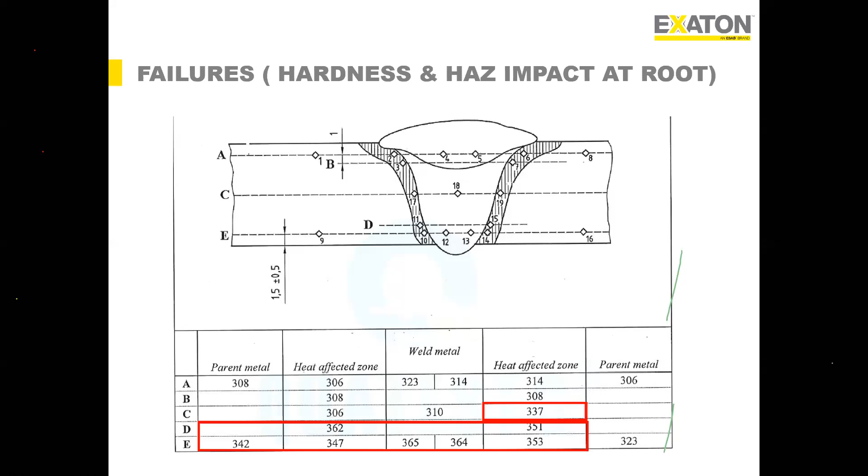Because we did not have enough nitrogen, when you do the testing you find pitting corrosion. So we recommend going for 2 to 3% nitrogen to avoid such pitting. You see, the welder skill was really fantastic - such a nice weld bead, but because of the lack of nitrogen, it got pitting.

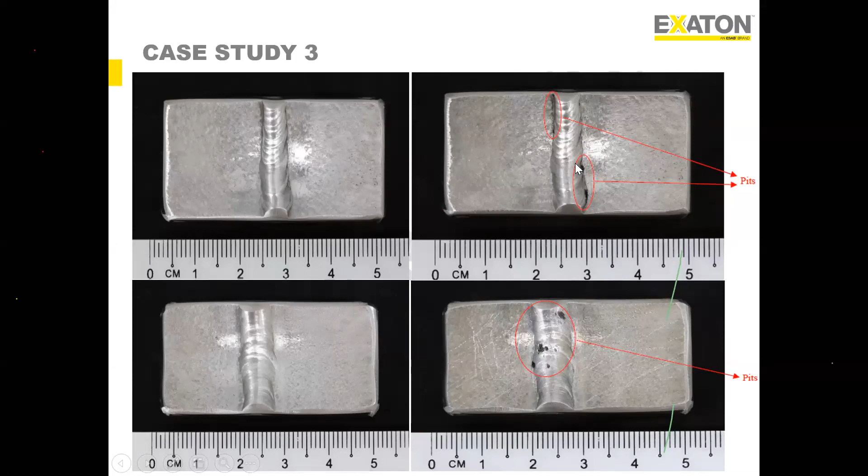The second one is a good example of really terrible welder skill. Please remember, when welding the duplex family, try to go for a skilled welder. This kind of weld root has high potential for pitting. We can take all kinds of precautions like proper shielding gas and proper filler metal, but if this kind of weld bead appears on the root side, these are the areas - stress risers or sharp edges - that have very high potential for pitting.

This one is also a potential risk. Why am I trying to show this one? You can see the heat tints are there. Heat tint basically means the amount of oxygen content in the root side is high. Higher oxygen content means lower pitting resistance. So we recommend that for the root side, the maximum oxygen content should be 50 ppm - 50 and below is always better.

So from the heat tint, you yourself can see that if it's much darker, it means your oxygen content was high, or there was high heat input, or it got burned. So an oxygen monitor is very essential for welding any duplex material.